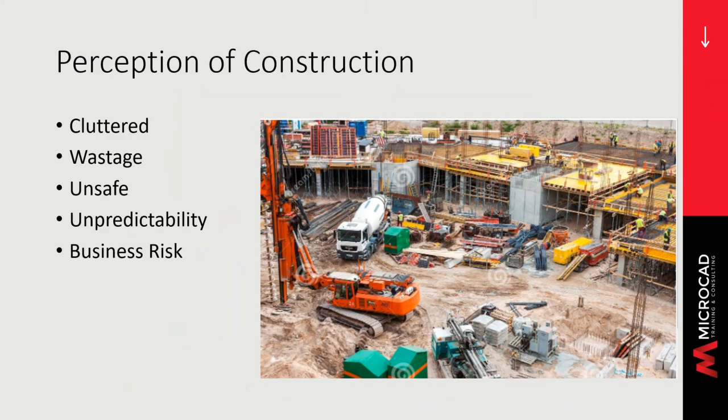Which is why there are construction managers. As professionals whose ultimate responsibility is to the owner, construction managers do whatever is necessary to deliver the project on time and on budget while handling all of the unexpected curveballs on the way.

Construction managers have been a necessary and valuable part of successful projects for a long time, but Deloitte Consulting tried to envision what construction might look like in the near future. They anticipated increases in prefab and modular construction, a site full of sensors feeding information to a central location. Robotic assist devices would do the heavy lifting for the workers. To counter material shortages, strategic sourcing ecosystems will be developed. And BIM to provide a single source for all of the data needed to make these tools work.

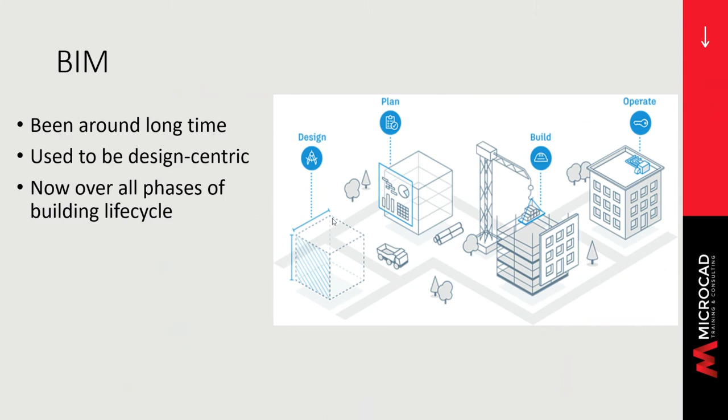BIM for design has been around a long time and has been clearly successful as evidenced by the inclusion of BIM requirements in project bidding. But it's only in the last few years that BIM models incorporated construction and fabrication data. And it's even more recent that workflows were created embedding RFI and change orders into the BIM model.

If we look at the flow of data over the life of a product, we see that in conceptual and design stages, there is tremendous authoring of data. The BIM model becomes more and more detailed and data rich. At pre-con and construction stages, we use that data, transforming raw materials into a completed building. And in operations stage, we continue to take advantage of the data.

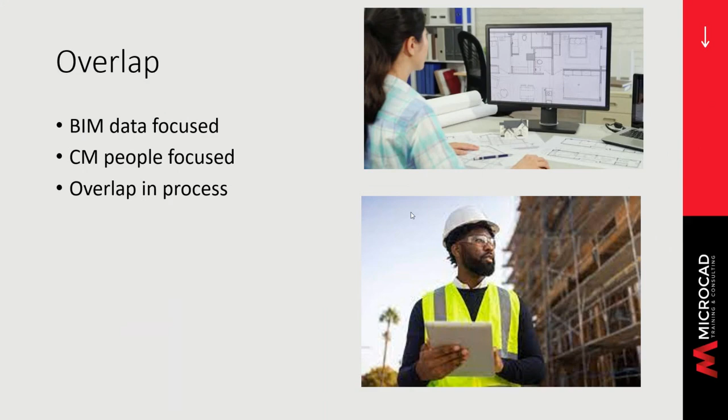So we see that to have the most effect on the project, construction managers need to be involved early on when there is more opportunity to make significant changes painlessly. While BIM is data-centric, construction management is all about people using the data. Naturally, these processes overlap. Again, construction managers need to be involved early to help shape the data collected and ensure its appropriate use. So how is a BIM project different for a construction manager? Because BIM projects are data-driven, the construction manager must be involved early on when the data requirements are being set.

If all the information about a particular piece of equipment, its weight for example, is included in the BIM model from the beginning, when the construction manager wants to plan crane lifts, the data is right there and they don't have to scurry around trying to find cut sheets or contacting vendors. The data in a BIM project is always available and always current, so there's no more worrying about whether this is the most recent drawing or if the latest changes have been incorporated.

All partners in the project have access to the same information, everything in one place. BIM provides the collaboration tools to encourage communications and resolve issues quickly. These tools are built into the software so you don't have to look at three or four different places.

So the BIM approach helps the construction manager throughout the entire life cycle of the project. It provides data for verification, coordination, visualization, scheduling, conflict resolution, and handover and operations.

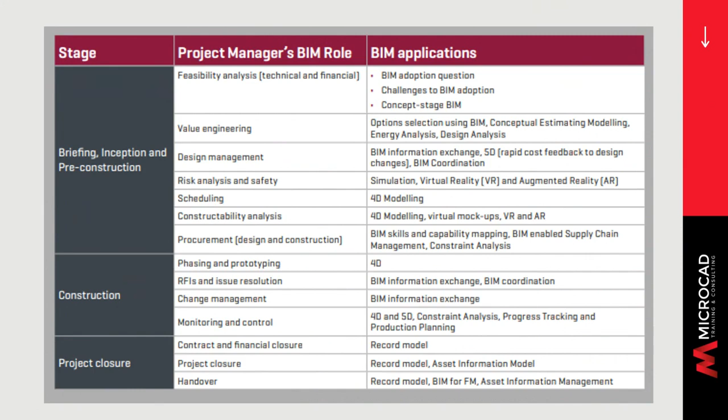Let's look at these phases a little deeper. At concept time, the construction manager can help define the project, lend their expertise in value engineering and constructability, and keep an eye on risks. The project site and building can be visualized to identify any concerns. Long lead time items can be highlighted and delivery slots reserved.

During detailed design, the construction manager can watch the project development, identify underperforming teams, coordinate the work of the various disciplines, and be a conduit of communications to reduce surprises. The construction manager could oversee the finding and resolving of clashes and direct the teams on the changes needed.

So what would that look like for the construction manager?

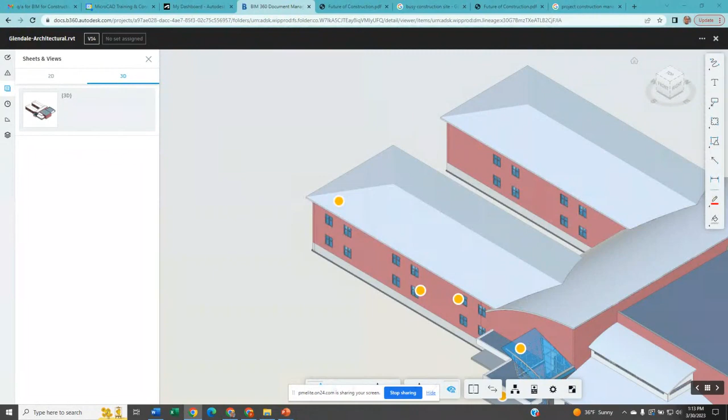Oh, good heavens. Technology is nice when it works, when it doesn't... I was showing, I thought, my screen, so let me unshare and share again. Mm-hmm, yeah, let's try that. I want the entire screen. So now do you see a building? Yeah, now I do, thank you. That must have started when I went from the PowerPoint to the live part of it, is that correct? Yeah, I think, but I was in another tab, so I just caught it. Okay, alright, I apologize.

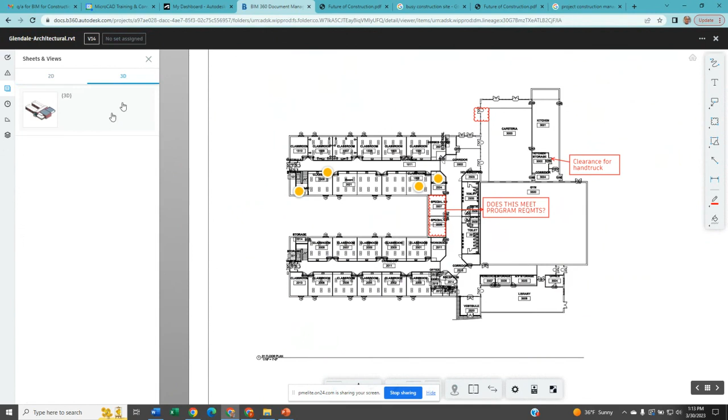So what we were saying before, and I'll briefly go through again, is the idea that we've got this 3D model, and with it we could identify issues. With the 3D model there are 2D drawings, but they're tied together. So if there was a version change in the 3D model, it would update the drawings automatically, guaranteeing you're looking at current information. These drawings can be redlined and issues created, just like I was showing on the 3D version, representing questions that need to be responded to.

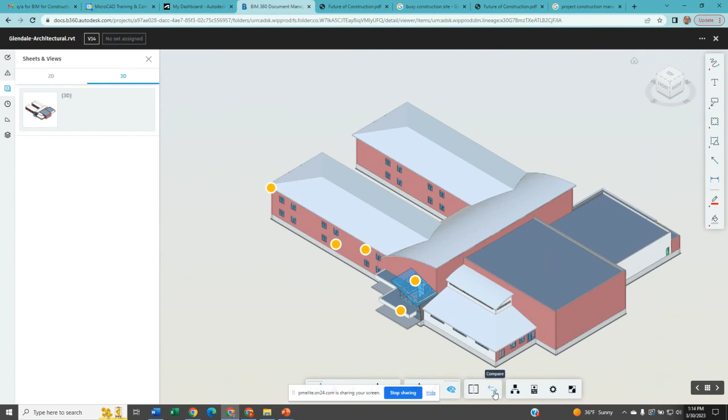Alright, so I think that catches us back up, I apologize for that, we were talking about versioning. The data management part of this system keeps track of all the information you provide, and keeps a version of everything you've done. So you could, as I was saying, go back to an earlier release from last week. Or the big question in the room is always, well, what's different about this version from the last version?

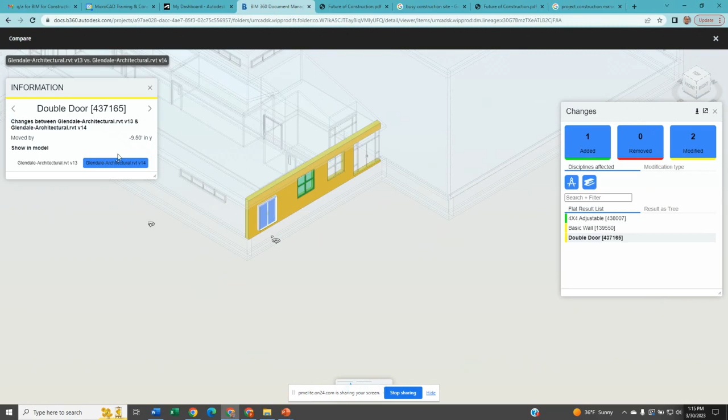If I select the door, it tells me the door was moved by 9.5 feet. So in this case, the architect decided they wanted another window here, slid the door over to make room for the window and put the window in.

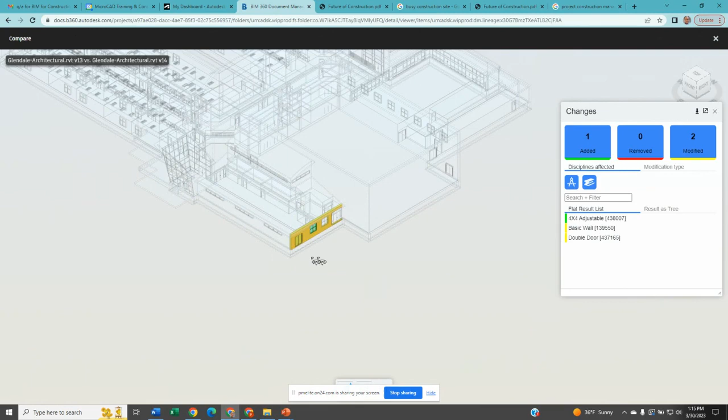This is extremely valuable to all of your consultants and partners on the project, because they can see what's changed from version to version and how it affects them. So the MEP engineer would be doing this all the time just to make sure they understand what the architect has changed and how it might affect the MEP design.

So we're talking about MEP as well as the civil and the electrical and all the different consultants that are working on your project. Let's look at how those teams really interact.

When we look at the design collaboration part of this tool, we'll see that there is a number of teams. We have the architectural team, a structural team, an MEP team, all these different disciplines working on the project. These dots and squares represent drawing packages or release packages of information that they've issued.

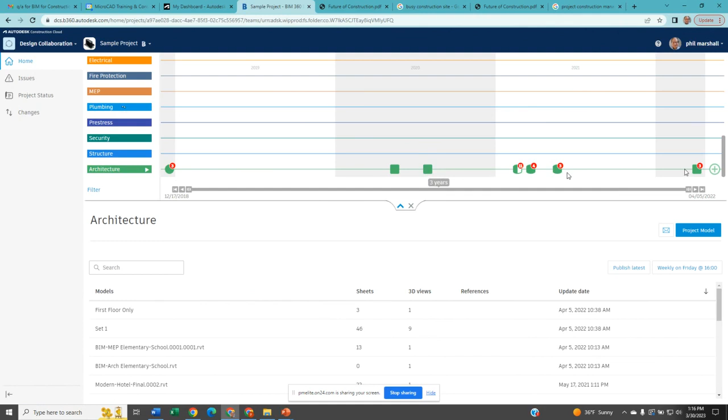So if we look at one of these issues, this is the architectural release package, which is the building we were just looking at, made available for use by all of the other partners. If the other partners had issued release packages, we'd see them on their own swim lanes.

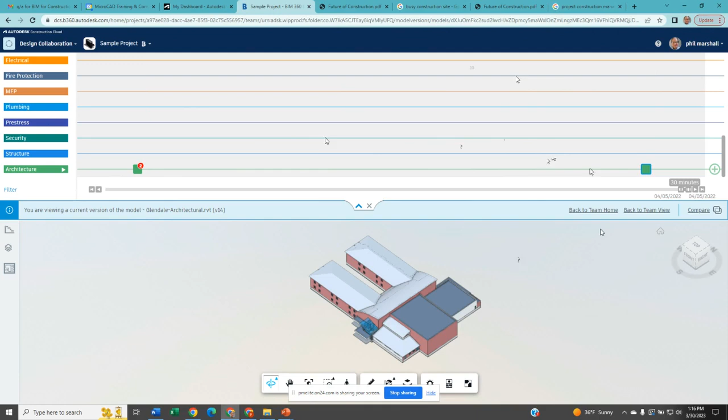So someone like a project manager or the construction manager would be able to look at this graphic and see who's released what project packages, what was in them, and how current they are. It'd be a quick way of seeing who's keeping up with the schedule and who isn't.

One of the things you'd do when looking at these release packages is coordinate them from one person to another. So when the MEP comes in with their updated release package and you want to compare it to the structural package, you want to see if somebody's run pipes through steel beams. That's part of what the coordination tool can do.

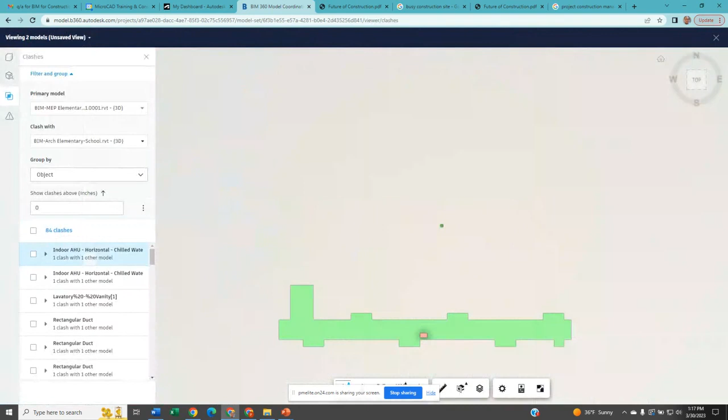So in this case, we're looking at architectural versus MEP, and we want to find what clashes have occurred. They found that there were 84 clashes, 84 interferences. If we look at a couple, here it shows that this air handler unit interferes with the ceiling underneath.

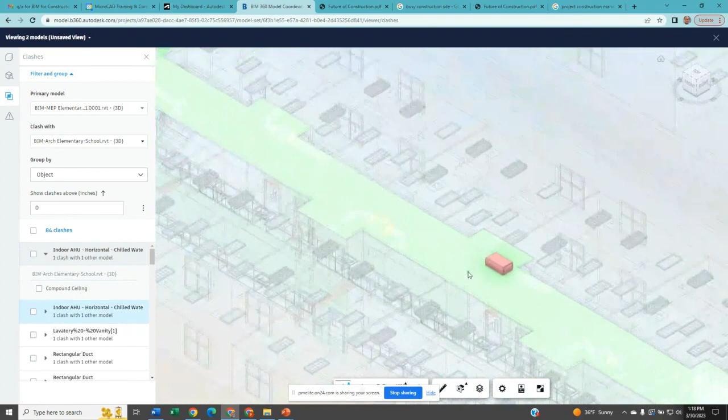So pretty evidently somebody moved the ceiling or else they moved the air handler unit. If we look at another one, there's another situation where there's an air handler unit in the ceiling, so evidently somebody moved the ceiling and it affected those two air handlers. So we find these interferences very easily.

So what we could do is take those two, create an issue for remedying them, send it to the architectural guy and say, drop your ceiling by 2 inches, and then the interference would be resolved. So it becomes part of the issue process, which, if you remember, is never forgotten in the system.

So even after this is resolved, we'll be able to go back and see how many interference issues were caused by this group and how many were caused by that group, how many were resolved within X number of days. So you can actually get some analytics to get an idea of how well you're doing on handling these kinds of problems.

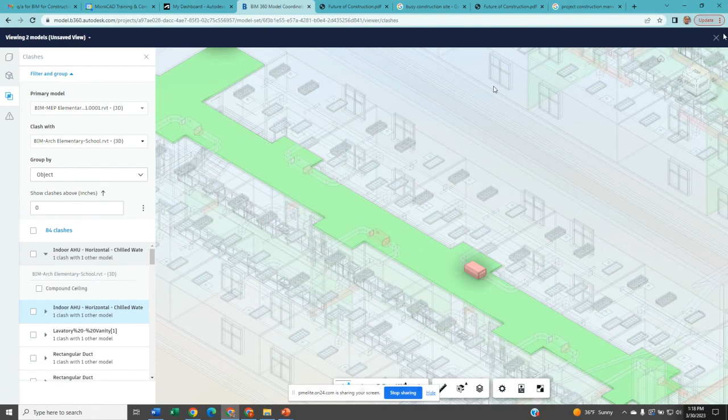And to pay attention to all of those problems would be difficult if you had to click around and try different things. But if you're the project manager, you'd probably start your day at the project home, which gives you a summary of what issues are outstanding, what issues are overdue, what design packages have been released, and what's going on at the site.

So this is information you would start from, and then you could drill down and look at the issues, and drill down and see what design package was released and what it consisted of. That's a great way of getting an overview of the status of the project as you're trying to figure out what needs to be done.

Now, these tools are available throughout the project lifecycle, but they're particularly useful during the design phase.

All right, so I'm going to go back to the slides. All right, so we see the slides now, yes? Yes. Yeah. Yes. All right, so that's 1 for 2.

All right, so we were talking about the design stage and showing you how those collaboration tools are efficient and effective for use during that phase, although they're available for the entire project. During the pre-construction phase, what you're doing is you're deciding on the scope of modular construction, you're planning for the offsite fabrication, you're deciding what is going to be done offsite, how they're going to be doing it, and you're going to look at scheduling delivery of those components.

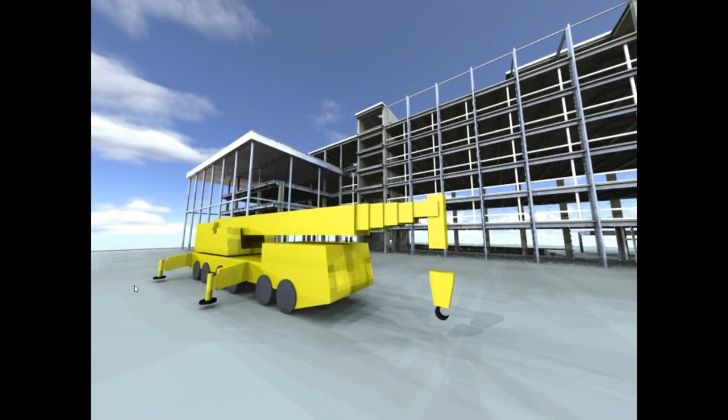Because what you want to do is control the access to the site. You could arrange what teams are in the buildings at what time. And this 4D BIM model that we have can help in equipment access, reserving laydown areas, and visualizing the reach of cranes for lifts.

Actual construction is where the collaboration tools are most effective. Aside from providing up-to-date construction drawings and data, the BIM software can provide checklists for safety, appropriate PPE, correct equipment training, and so on. The BIM software also holds a record of what decisions were made at meetings to resolve issues. Markups of drawings and identification of issues or concerns can be done right in the collaboration tool, just like I showed you a few minutes ago, making a single place to look for all communications.

Rapid RFI and change order process is important to keep the project on schedule. Now, this is the formal process of the RFI that is asking for specific information for a specific problem, which may result in a change order and would result in a change in the dollars. So these are formal processes. When someone creates an RFI, it goes through a formal RFI process that's routed to the correct person, and then it gets moved to where decisions can be made.

But there's a formal process for that, as opposed to what I was showing you before with those orange dots, where it's informal, anyone can create those issues and people can resolve them as they need to without going through a workflow. RFIs are a bit more complicated, and you really need to have a controlled workflow for the RFIs.

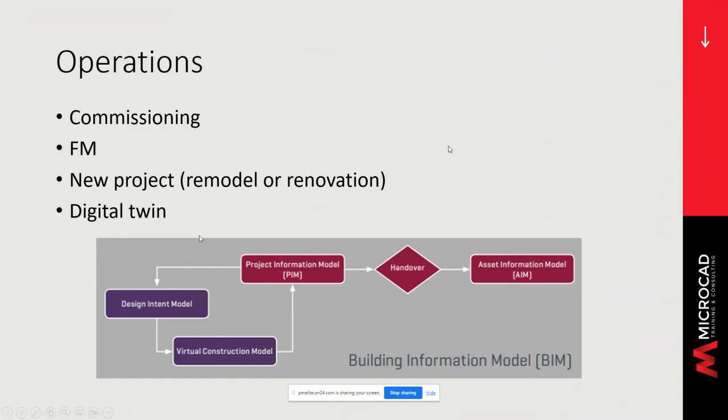Okay, so we have talked about the role of a construction manager. We've identified the trends that are occurring in construction and shown that they all depend on strong data management. The BIM model is central to maintaining a single source of data and dispersing it to all partners on the project. What then makes a successful construction manager in the BIM era?

Early involvement so they can ensure the right data is being captured. Educate and ensure that all partners use the same collaboration tools. And maintaining the BIM model during construction so it becomes an as-built handover model. This is what the owners want from a construction manager, and this is what you can deliver with BIM collaboration.